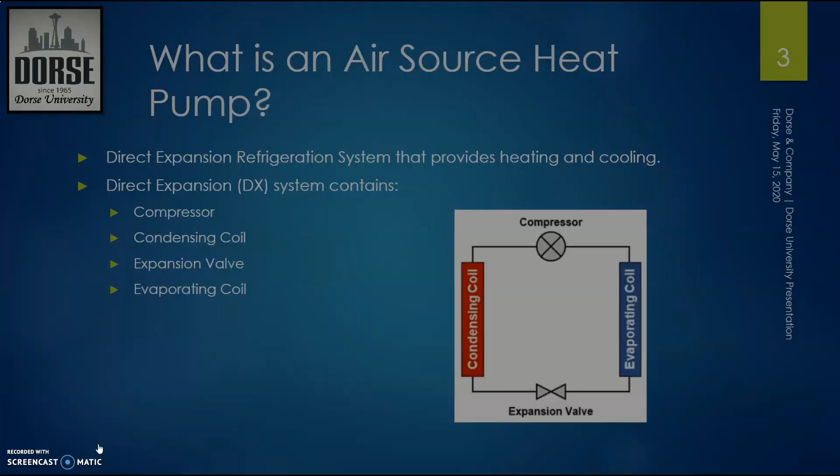In a typical standard DX system, the condensing coil is always rejecting heat, and the evap is absorbing heat. With the air source heat pump changing directions, Greenheck revised their terminology on this. So when Greenheck talks about the indoor coil, they're referring to the coil located in the unit, and the outdoor coil is typically the coil located on the exterior of the unit.

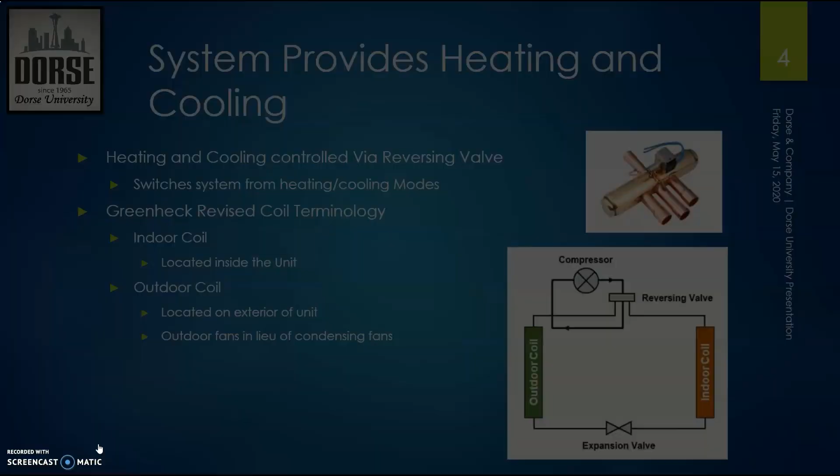Air source heat pump overview: in cooling mode, heat is transferred from the supply airstream to the ambient outdoor air. The indoor coil is evaporating, the outdoor coil is condensing. It's the other way around for heating mode: heat is transferred from ambient outdoor air to the supply airstream, and the indoor coil is condensing while the outdoor coil is doing evaporation.

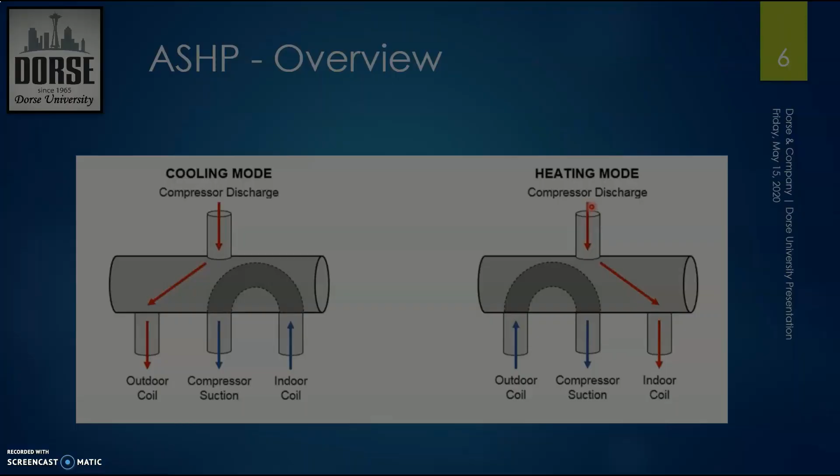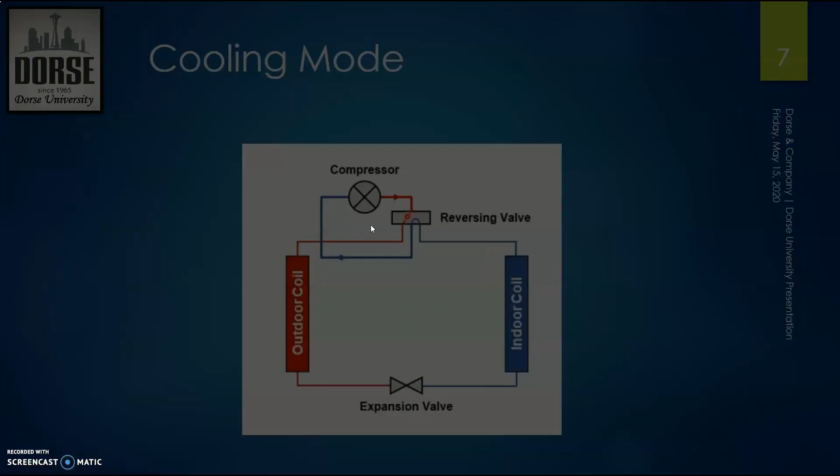Here we have our diagram of cooling mode. The compressor's hot gas comes out, goes through the reversing valve, into the outdoor coil, where heat is rejected. It comes down through the expansion valve, into the indoor coil, where heat is absorbed, then back to the reversing valve and into the compressor. The same effect happens on the heating mode side, just going the opposite direction: the indoor coil rejects heat into the supply stream, and the outdoor coil absorbs heat. The system is exactly the same, just the reversing valve is switched the other way.

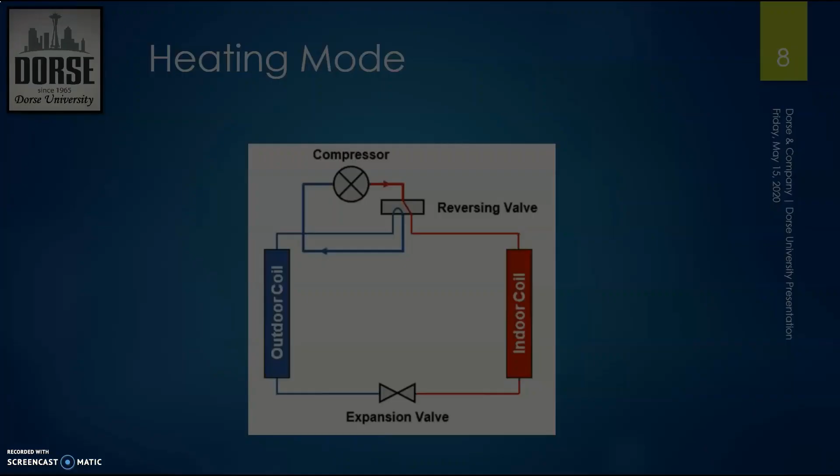Some of the advantages: it's highly efficient, and it's rated by the COP. Basically, COP is a ratio of the heat output in watts over the electrical input in watts. Typically these air source heat pumps have a COP between 2 and 4, which translates to 200 to 400% efficiency, compared to a gas unit which is only about 80% efficient. So you can see the benefits of that already.

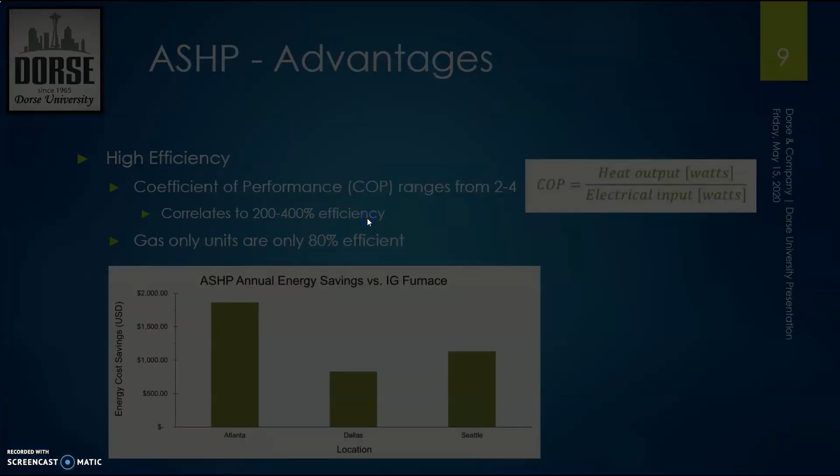So the next thing we got is no carbon footprint, which is huge in Seattle because we've got the new green initiative where they're trying to make all buildings zero emissions. So you're getting rid of a lot of gas units and going a lot electric, and this is going to be huge for doing something like that going forward with the green initiative.

It's a safe and clean alternative to conventional heating. There's a potential lower first cost depending on if you need secondary heat or not. If you don't need secondary heat, this is always a good option, and it's much cheaper. We haven't really talked about secondary heat yet, so we'll cover that next.

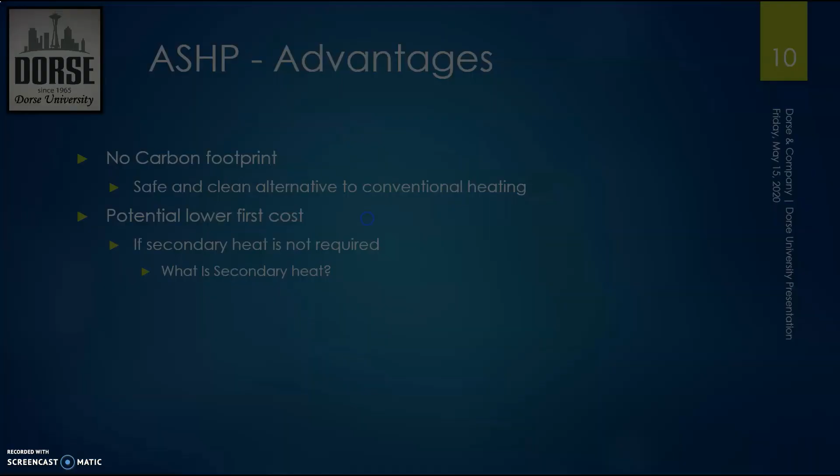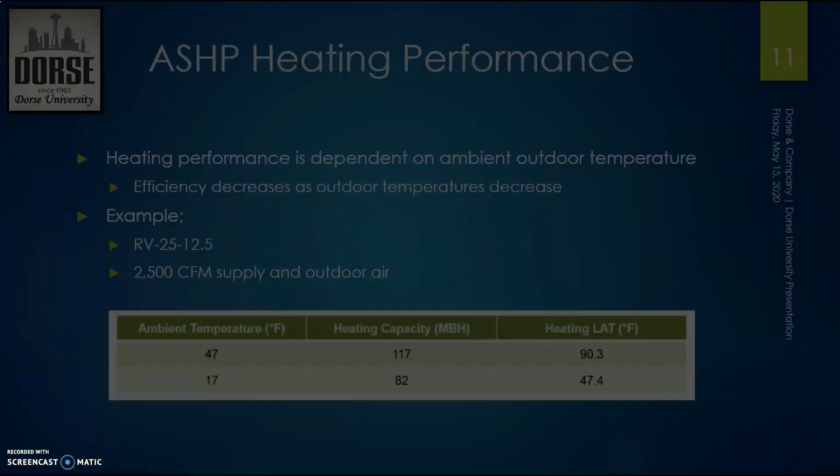Say it's 17 degrees outside — that's going to drop your efficiency down to 82 MBH heating capacity, with a leaving air temp of 47.4, which is definitely not going to cut it. That's basically why you're going to need secondary heat for cold climates. A secondary heating source will be required to satisfy the indoor temp at set points when you drop down into low temps.

There are a few options you can select when doing this in CAPS. They include none (no secondary heating), indirect gas, hot water, or electric heat. If you do pick none, or if none disappears and you wanted it, there's a reason why. It'll disappear if the unit is configured with 100% outside air and outdoor temps below 50 degrees — that's obvious because you've got to have some sort of tempered air. Typically code calls out for like 50-55 degrees, and then partial recirc with outdoor temp below 10 degrees.

At these conditions, we're forcing you to use the secondary heat just because you're not going to be able to maintain a good, comfortable air temperature coming into the space.

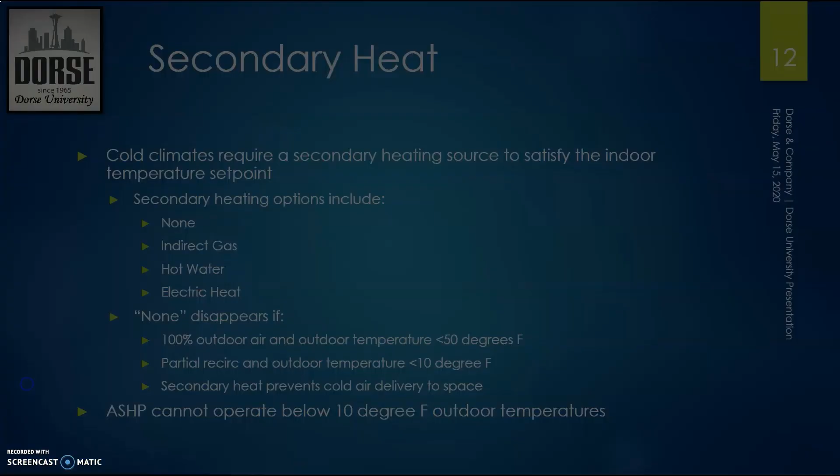With that, the surface of the coil gets extremely cold, and if there's any moisture on it, it'll build up, and the result will be frost and ice, which you definitely do not want. So the air source heat pump will require a defrost cycle.

What we've done to make this happen is we switch the system to cooling mode, which makes the outdoor coil want to reject that heat, which will heat up the surface of the coil so no frost can build up. When it's in this mode, the secondary heat will be used to prevent any cold air delivery to the space.

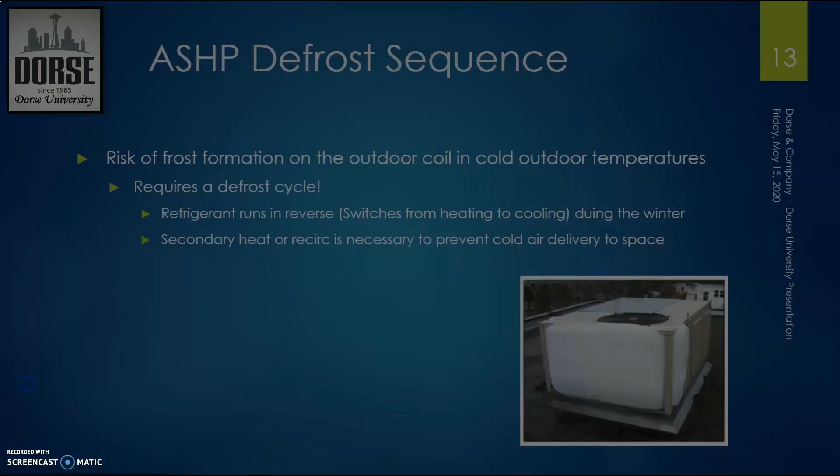So we're going to talk about what line you can get this in. The Greenheck air source heat pump you can get in the RV series, RV 25 and 45, and then the RVE series, which is the RVE 40 and 85. It doesn't go any bigger because the air source heat pumps are only available from 5 to 30 tons, which translates to about 800 to 10,000 CFM. Standard features on these include the inverter compressor as well as the lead EC outdoor fans.

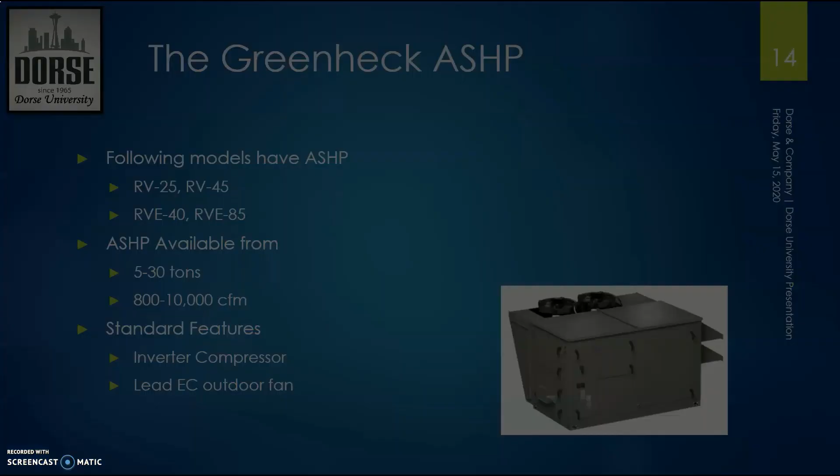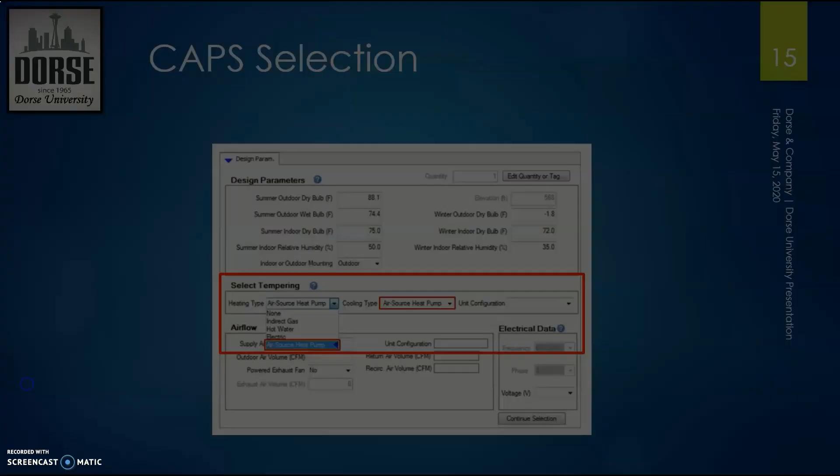So some of the selection limitations: you can't mount this indoors. The reason being, the heat is absorbed and rejected from the ambient outdoor temp, so it cannot be inside.

Voltages that are 575 cannot be done — this being, we just couldn't find any 575 inverter compressors. And then elevation cannot be greater than 6,500 feet — that's just the manufacturer's inverter compressor limitation on that. So if the air source heat pump doesn't show up in the heating or cooling tab, it's probably because of one of those reasons, so you might want to double check that.

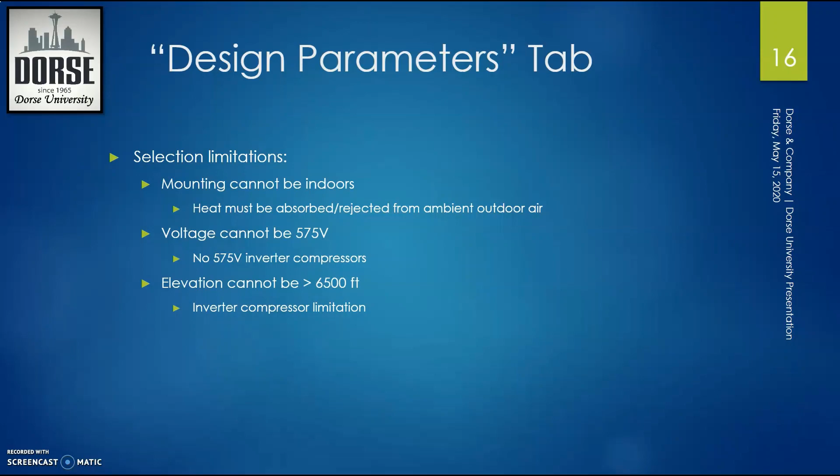The top one is the cooling section, which is fairly similar to all the other DX selections we've done before. There isn't anything new going on here, so you just gotta kind of go through and select what you want — what kind of reheat methods, calculation method, leaving dry and wet bulb temps.

The heating section, I'll get into that a little more on the next slide.

So the heat pump tab and that little heating section - we're going to talk about this, and it covers the secondary heating. There'll be a drop down here with options for secondary heat. We discussed before: it's none, gas, hot water, electric.

Once again, none will disappear if you're at 100% outside air and less than 50 degrees, or partial recirc with outdoor temps below 10 degrees. Outdoor air temp is important because it's used to size the heating capacity, so it should equal the lockout temp used on site. It's got to be greater than or equal to the winter outdoor dry bulb, and the absolute minimum is 10 degrees, no lower than that.

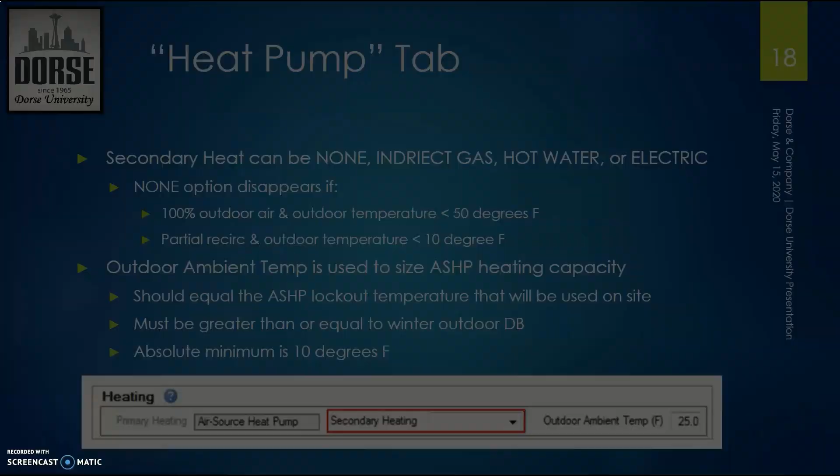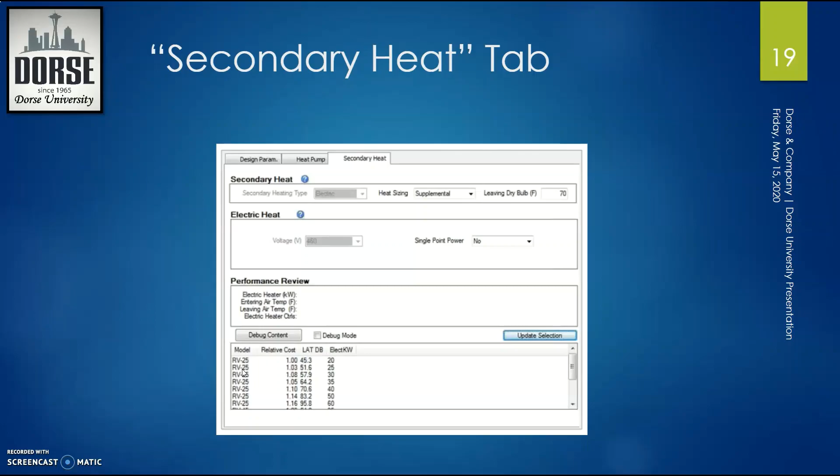One being supplemental heat or backup heat. The supplemental heat will work as secondary heat to work at the same time as a heat pump, whereas the backup heat will not. So if the air source heat pump is off, the backup heat will kick on, whereas supplemental, they'll work together. So heat sizing for gas and water is always supplemental.

This option should be populated when you select the type of supplemental heat. Heating for electric can be either supplemental or backup. So heat sizing for 100% outside air will always be supplemental, just because 100% cold outside air needs to be heated by the electric heater during the air source heat pump defrost cycle. Forcing it to be supplemental will allow them to operate at the same time.

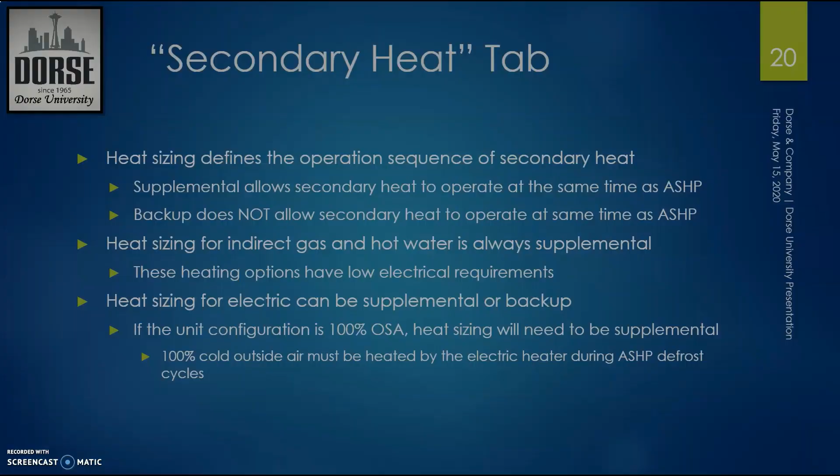Next, it's going to show the efficiencies of the air source heat pump, primary heat and secondary heat specifications. So if this unit is 100% outside air, it's gonna show you the cooling efficiency and heating efficiency, and the ISMRE and the ISCOP. And if we're partial recirc, the heating and cooling is going to be shown in the EER and IEER, or COP at 17 degrees and COP at 47 degrees.

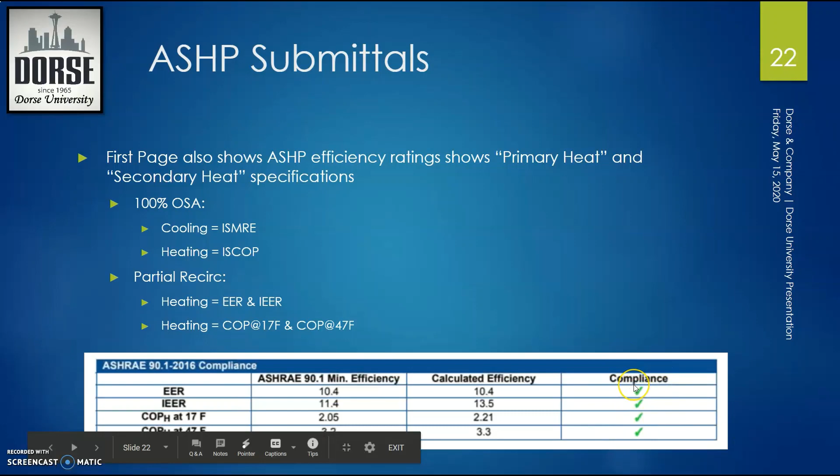So you'll see at the bottom everything's calculated per ASHRAE 90.1. If you meet compliance, you'll see a nice little check mark there, which is always nice to see, just to confirm that you got everything correct.

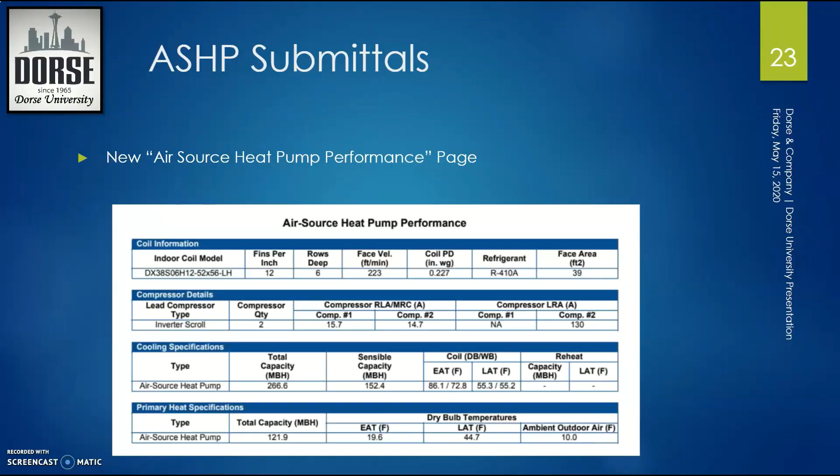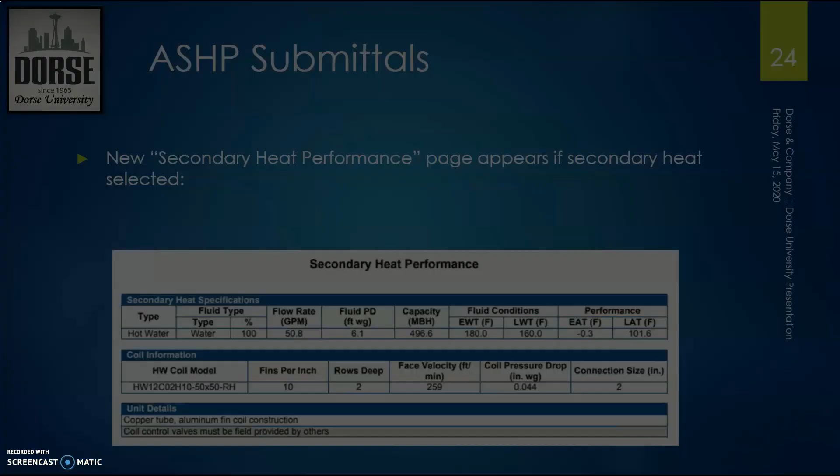And then finally, just to wrap things up here: we've got an air source heat pump, which uses refrigeration to provide both cooling and heating. A reversing valve switches refrigeration flow direction, so that's how you get the heating or cooling aspect of it. In cold outdoor conditions, the air source heat pump loses capacity and may even require secondary heat. So remember, keep that in mind.

Air source heat pumps can operate down to a minimum of 10 degrees outdoor temps. Anything lower than that, you're going to have problems. And I think the compressors are also rated only to 10 degrees, as it is per the manufacturer. So air source heat pumps in CAPS - there is a new heat pump and secondary heat tab, which we went over.

So those are probably the two most important things when selecting the heat pump function. And then we also covered the new submittal pages and what they entail.